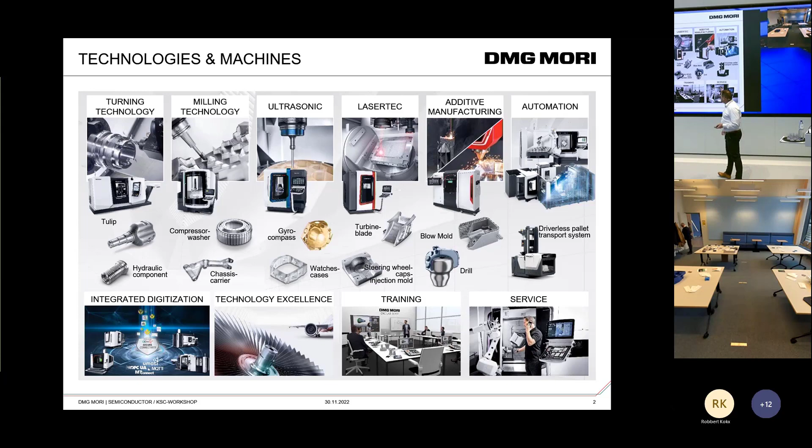Our topic is also automation. This is one of our topics meanwhile, same as digitization. Later we will talk about PMI, also from Mitutoyo, and of course digitization. We are very open and we are willing to go ahead with the new trends in future, also based on PMI models, where we see big benefit for all the later stages during the process. We have technology excellence centers for aerospace, die and mold, and we also will create the same one for semiconductor. We have training and service. We have a presence worldwide in 79 countries.

The green ones are the original DMG responsibility. The red ones are under the lead of Japan. We have 2 headquarters. One is in Tokyo, under the lead of the big boss, Dr. Mori. And we also have 1 headquarter in Germany, in Bielefeld, under responsibility of our chairman, Mr. Thönes. In total, we have roughly 12,000 employees, and we deliver roughly 12,000 machines per year. So 1 employee, 1 machine. Here at ASML it is maybe 1 machine, 100 employees or something like that. There is another relation, just to get a feeling.

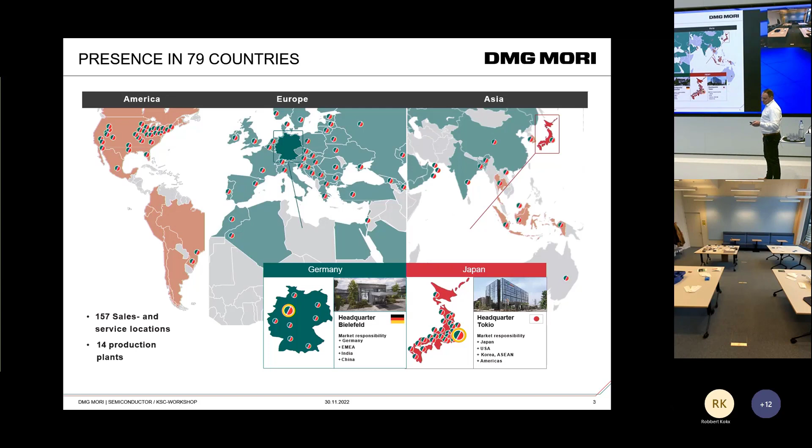We are also double stock listed. We have DMG MORI AG in Germany, and we have DMG MORI CO Ltd in Japan. We have in total 14 production plants. Here also you can see the original green ones from DMG, the red ones from Mori Seiki. We have the cooperation since 2009, so it's already 13 years old and is working really very well.

As I said, I'm from DMG MORI Pfronten. I can show you again, this is the factory in the south of Germany, number 2. This is the biggest factory under the lead of DMG. We had a technology day end of October. Mr. Granin was joining and also holding a keynote speech. And so, it's a good cooperation. And in our factory, we produce only 5-axis machines. You will see later in the video the meaning of a 5-axis machine.

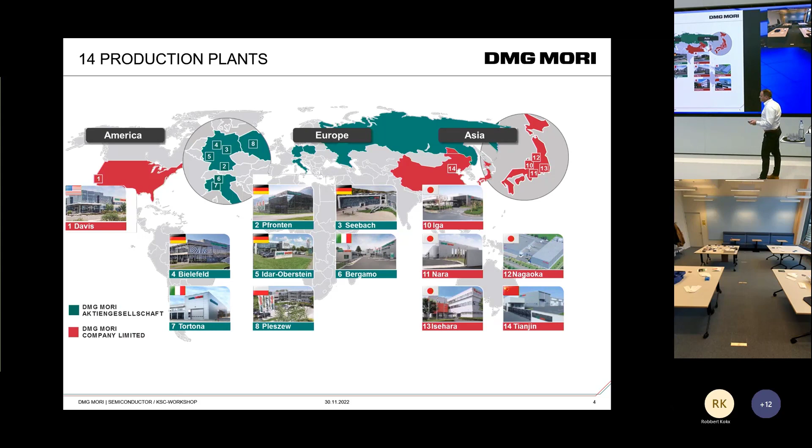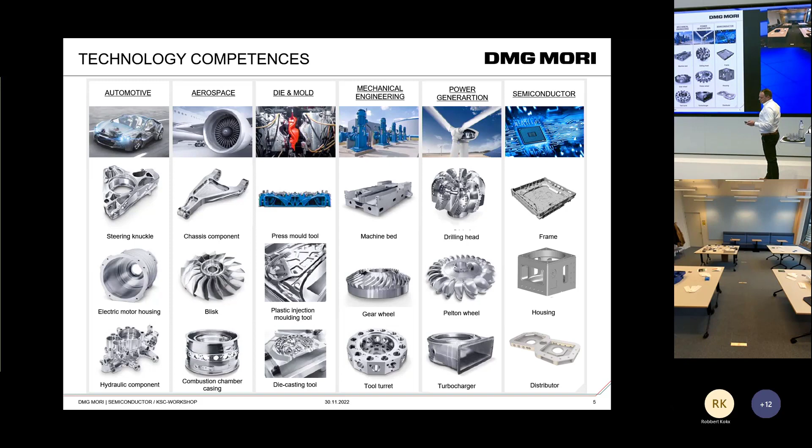Aerospace, we are very, very strong. We have here an excellence center. Excellence center means we get a drawing from the customer and then we check the complete process. The strategy, the programming, the tooling, the coolant, the software, the machine itself, of course. Mostly aerospace machines are equipped with a lot of special options because this is also high-class machining, especially the engine parts made from titanium or Inconel. We have die and mold. This is our origin. We have mechanical engineering. We have power generation. And we see also big potential in the business of semiconductor.

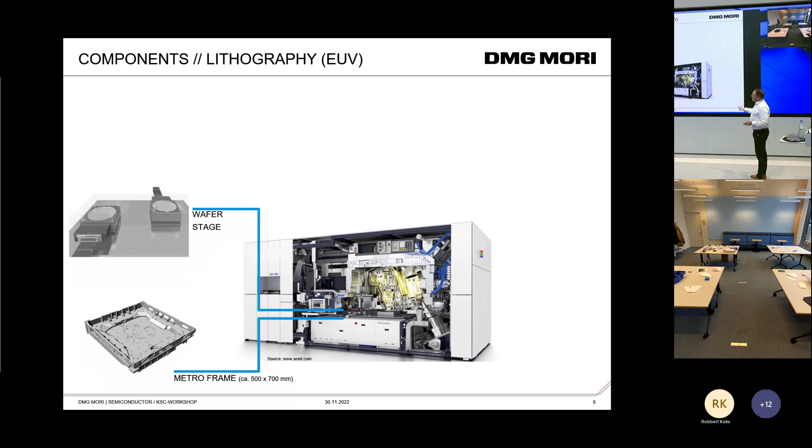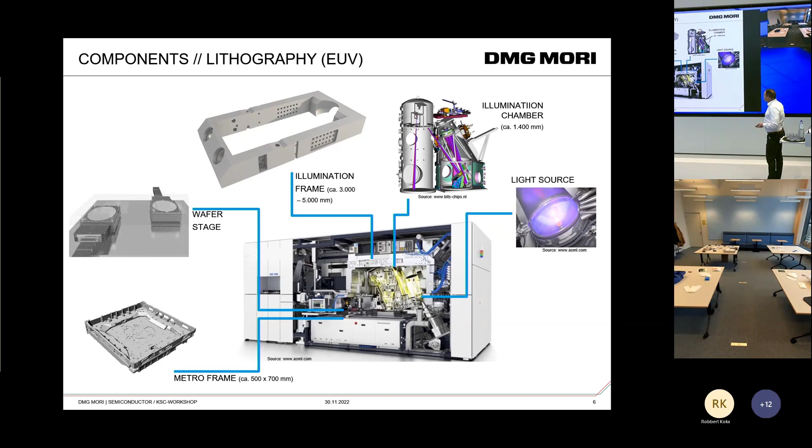Normally I explain the story from Adam and Eve about semiconductors, but I don't think I need to do that here today. I'll go into the EUV machine directly. I think you know the content well, and we see many interesting parts. We have the metro frame, titanium parts, the wafer stage, the illumination frame, which goes up to 5 meters in the next generation. We have the complete illumination chamber, the light source coming from Trumpf—also a very interesting customer for us—and we see the chucks. This is just a small selection of all the parts being produced.

But we from DMG MORI can offer the right machine for all these parts. We have the big portal machines up to 6 meters for the big frames. We have duoBLOCK machines for titanium frames—these are premium machines. We have monoblock machines for the smaller parts, and we have the ultrasonic technology for hard, brittle materials.

We can equip all machines with the mill turn function, meaning we can do milling and turning on one machine. This is very interesting for an optical housing like this. Here we can make 5-side machining of the complete outer shape, and we can do turning of the cylindrical center bore.

We also can equip our machines with micro precision to increase the accuracy of the machine to a very, very accurate level. Ultrasonic means the spindle is applied with a linear oscillation so you get a picking effect, and with this picking effect you can machine glass, ceramic, or Zerodur for all your mirror carriers or mirrors. The effect is the same as you know from your home drill—when you want to make a hole in concrete without the hammer effect, nothing happens, but then you switch on the hammer effect and it goes in very easily. This is the same effect here with ultrasonic.

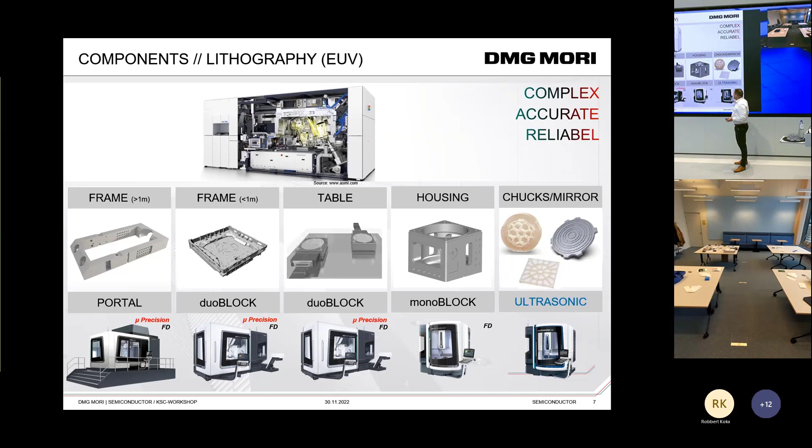This is our own company, and normally they use one of our machines as a basic machine, and they just enhance the spindle in regards to ultrasonic.

I'm here responsible for semiconductor for 3 years now, and I have a global view of the semiconductor industry. I know here in Holland, in Europe, and also in our company, many people think when you buy the machine from ASML, you can produce the complete chip. But this is only one part of the process—the lithography, the exposure of the chips. There's also the upstream process and the downstream process. For the upstream process, it's called deposition, where you add a new layer on the wafer. This is also very interesting for us, but here the music plays in the US or Southeast Asia.

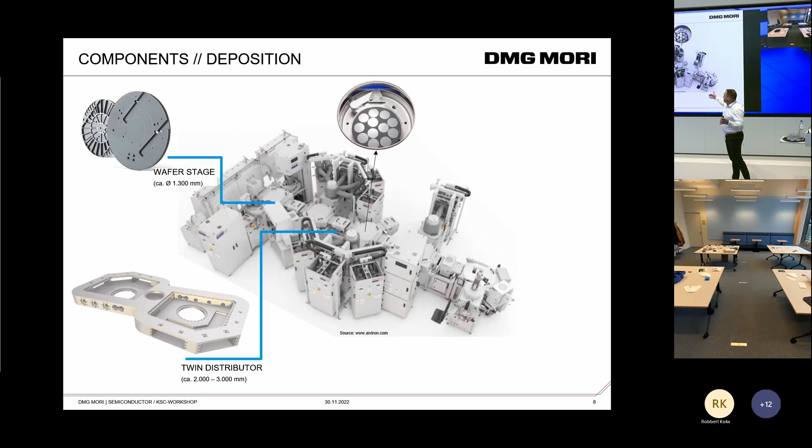Just to give you an overview of our machine capability—they also need very big frames machined out of one piece. They have wafer stages with a circular shape, perfect for our mill turn machines. They have graphite carriers; the wafer needs to be heated up to 1000 degrees Celsius, so you need graphite. This is also perfect for our machines because it happens by dry machining—there is no coolant used. Dry machining and chamber housings.

Over the last 3 years, we got so many requests about chamber housings. The distributor housing is the central part here. The wafers go in from the front side through the distributor housing, the wafer gets distributed to the chambers, and here happens the process—deposition, etching, cleaning, ionization. The principle is always the same, and the machines always look the same, though there are so many kinds of variants regarding chamber housings.

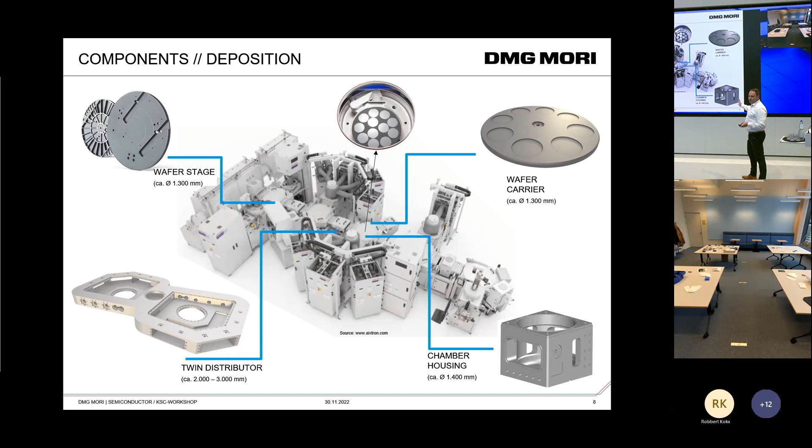We from DMG MORI like this part very much because it fits perfectly on our 5-axis mill turn machine. So here again, we have the big machines for the big parts. We have the chamber housings—this is a perfect part. We also have a video, but it's not prepared here for the presentation today. There you can see milling, turning, grinding. Maybe we can distribute a link for that. We have the stages and we have the carrier parts.

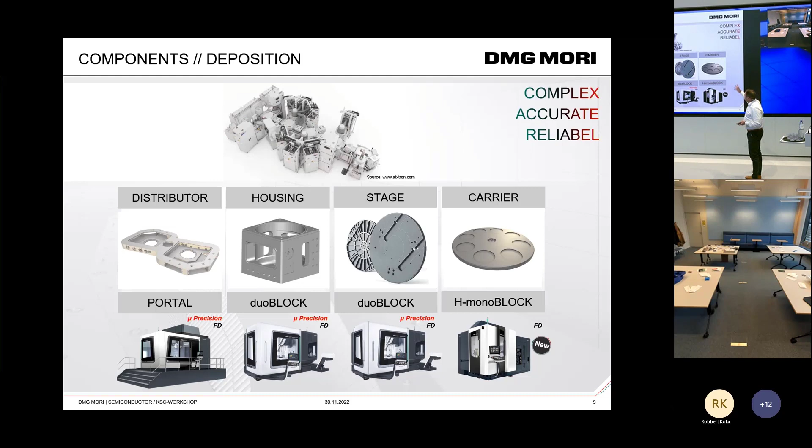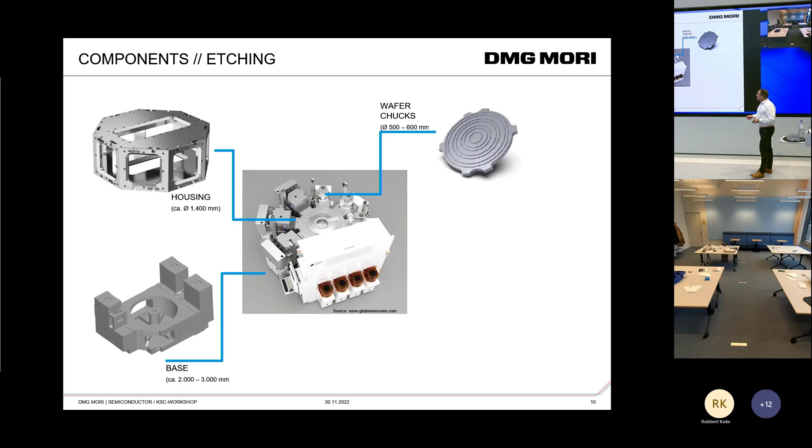Here is one machine for etching. Here we have the base part. We have the central housing for distributing the wafers to the chambers again. We have the chucks, which are always handling the wafers into the different housings. The chucks are mostly made from ceramic to be resistant against acid. And we also have the chamber housings.

So now I repeat myself. This is just a very quick view about the complete business and what we are covering. And we are very flexible.

We have universal machines. And if it is becoming more demanding regarding material, when we talk about titanium or stainless steel, or when we talk about high accurate parts, or multitasking, milling, turning, grinding, then we are the right choice.

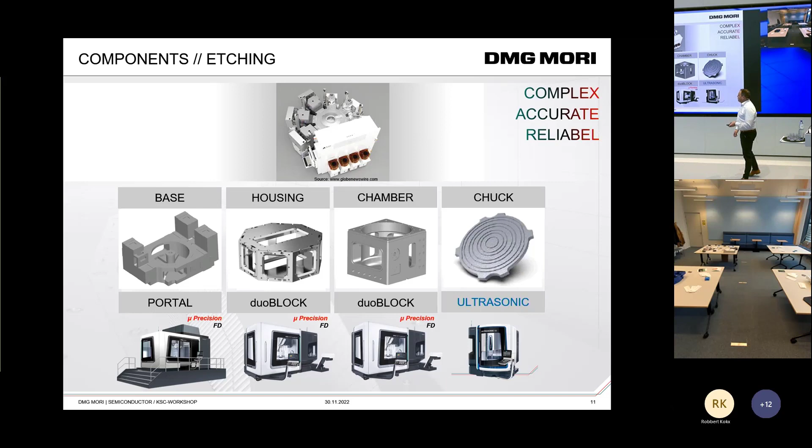One summary from my side, then I will hand over to Walter, and later I will explain the dummy part we have seen in the other room.

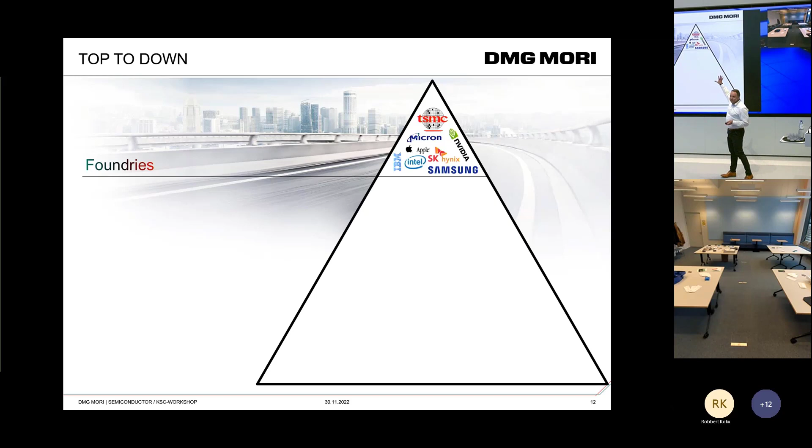I don't need to explain to you the foundries producing the chips itself. Here the wafer fabrication equipment is where you are. You see here some other names, and we of course try to touch or catch all these names. We also have good relations to Applied Materials.

The nice thing is you have no competition from the others. They are a completely different business, what they are doing. And we have the sub-supplier.

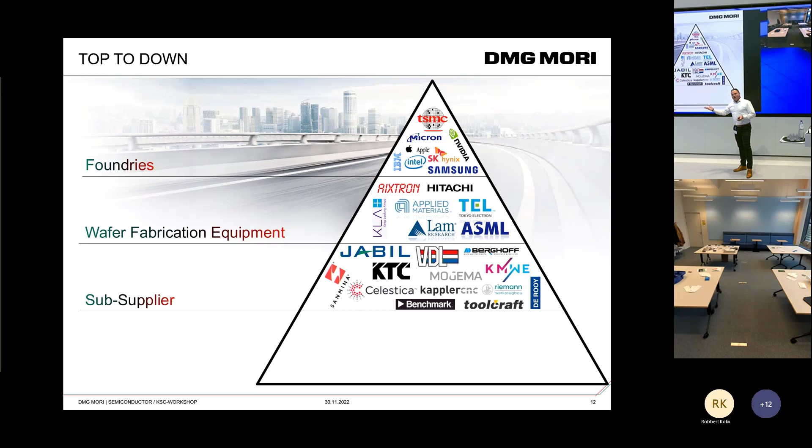Except for ASML Berlin, here are you our direct customer, but we supply our machine tools to the complete supplier network. And in this supplier network we find our customers for the classical machining - not hard brittle materials, but aluminum, steel, titanium, stainless steel. We find here the customers.

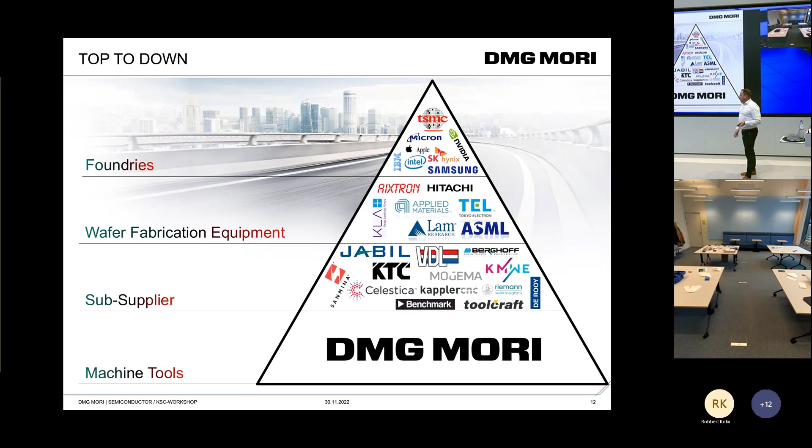And I know we already have a very good standing in this business. But it's a big honor for us that we have the contact directly to you and also to Mr. Sprengers, and that we could develop such a dummy part, as you will see later, together.

The beginning of the dummy part, Walter will explain, because he has the roots here in Netherlands, and he has the contacts, and here everything began.

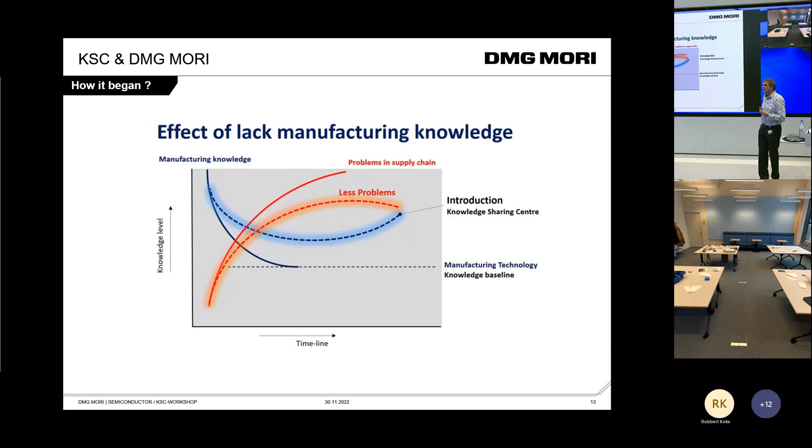And I think this is a very nice picture from KSC, where you see when a good collaboration is there, you will get a better knowledge from here, from the designers, but also from the suppliers for ASML or for other companies, so our customers.

The goal was to get more knowledge between the different parties. And you also see this nice picture on the website from KSC. And we're getting more and more part of it.

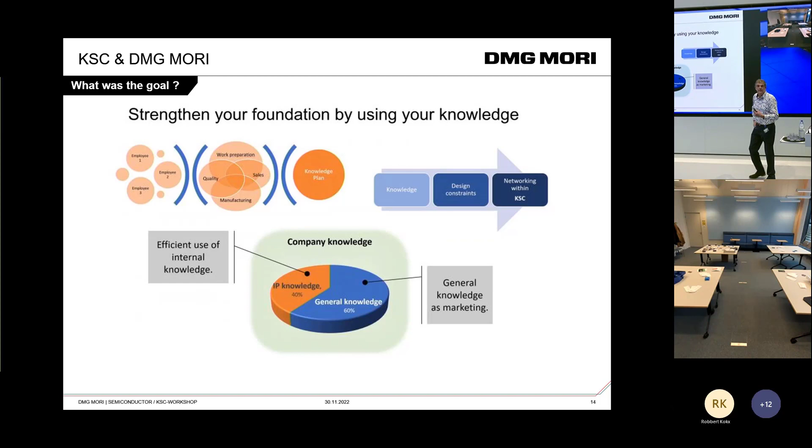But there was a challenge when we got in touch with each other, because we have the IP, intellectual property, from the parts, which are in different machines. And we have NDAs with our customers. We have an NDA with ASML. And our customers, so the suppliers, also have NDAs. So in that triangle, it's very hard to get all the information together.

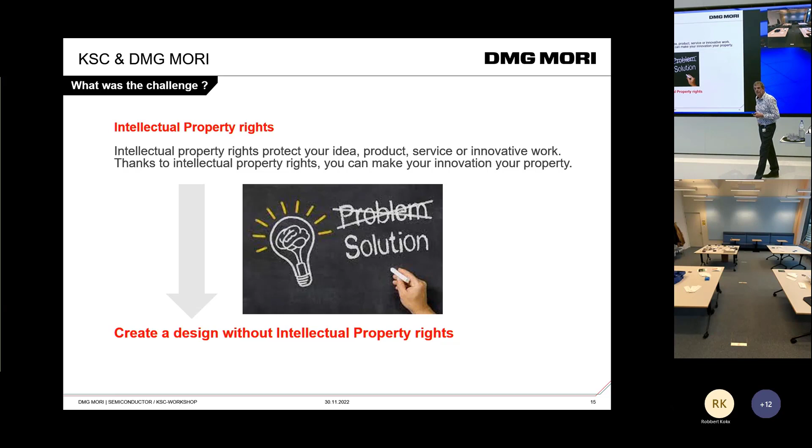So there was a problem, but for every problem there could be a solution. And after different discussions, we said okay, maybe it's possible to create a kind of dummy part. And in that dummy part, we can put in all the things which can be needed for the manufacturability of parts.

We have two bases, and one base, what we heard directly - let's say for us 2-3 years ago - is it must be based on a model-based definition. For most of you it's not a new thing. A few years ago it was completely new, but in the meantime it's getting more and more general. And that's the way of putting all the information from different parts in one system, like MBD, model-based definition.

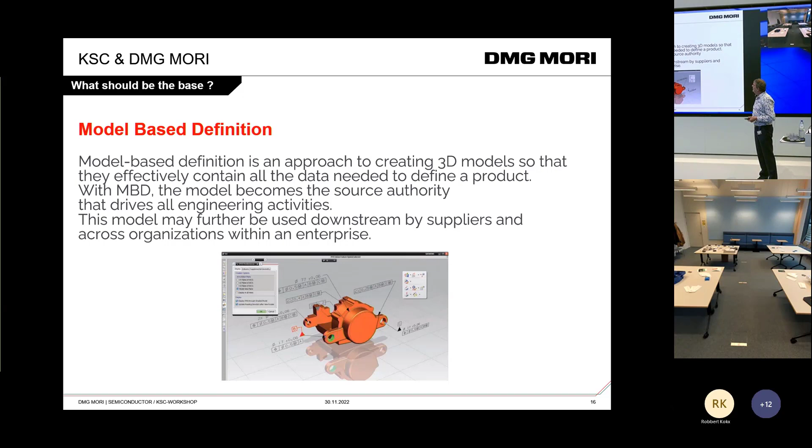And we had another base, that is the PMI, the product manufacturing information, which should be in the design of different parts. How can we use that PMI by programming the parts for our CNC machines, and how can we use the PMI for measuring it? Let's say the complete chain, starting from the design to the end of producing and measuring the parts itself.

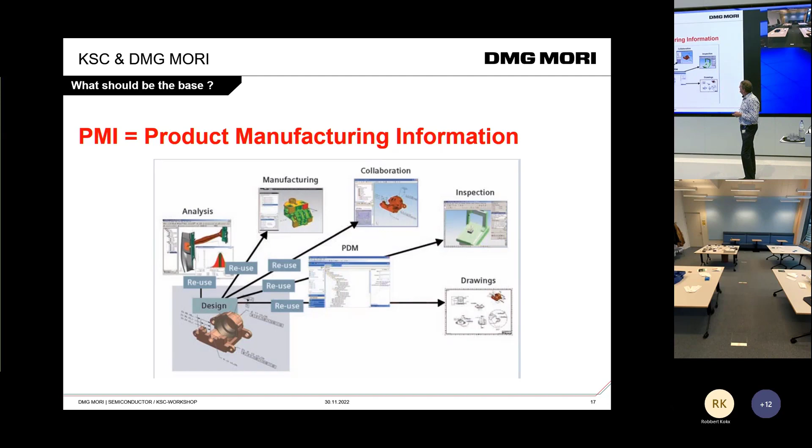What happens after some discussions, let's say December 2021, we get a first idea here from ASML, from the designer, what should be in a dummy frame. So a frame without any IP, with no NDA, and it should be free for everyone to use it. Yeah, that was the idea.

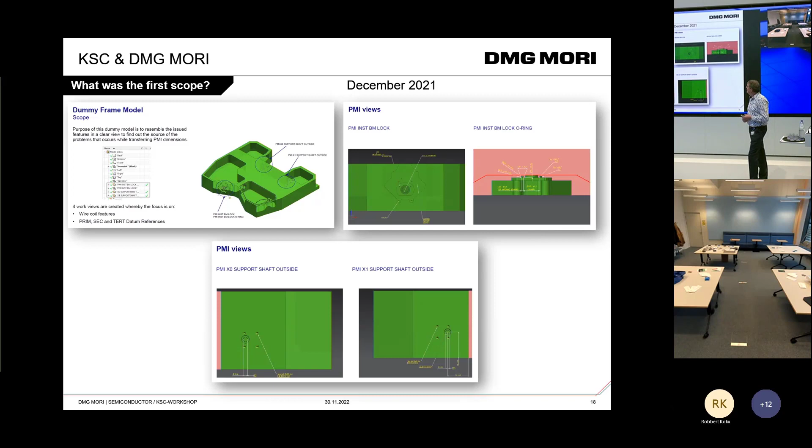Now after that, some discussions, we get the first idea from the model, and from the designers here, they said okay, we have to have some different things into that dummy file, into that first design. I will not go into detail, but here you'll see some screenshots from the first part what we received from our side.

Then there was the next step to go. Let's say they started in the beginning of this year, in January, with putting in different parts in the design, and in between we have for sure some meetings, and at the end, let's say at the beginning of September this year, we came together to a model where a lot of things are in which are needed for, in this case, the frame.

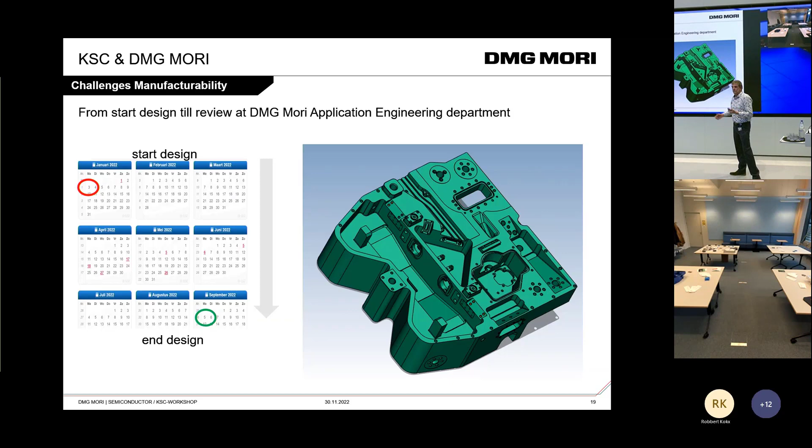Okay, when we have a model, then we get some challenges. What was the challenging? Manufacturability. We looked to the design and we said, okay, very nice model, but for some parts we need special tooling. And special tooling is, for example, angle heads.

You see later on in the video from Bernd how it works on the machine. But how do you come to an idea of designing such things into a dummy part, or in a general part?

But you have to know that an angle head is a special tool. Not every machine is able to use angle heads. Not every supplier is able to use angle heads in his existing machines. So you have to talk with your suppliers and with our customers. What do you need for these angle heads? Do you have a special machine? Do you buy different angle heads? How many operations do you have? In the first idea, we calculated maybe for one part, you need 20, 25 angle heads.

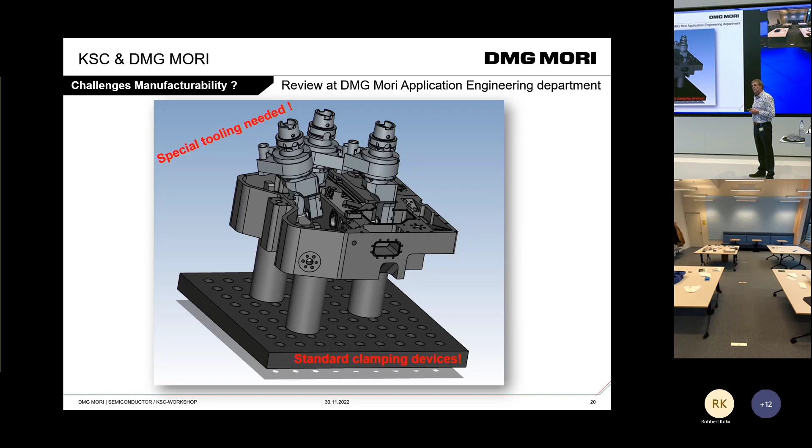What was the next challenge? Not really a challenge, but we have to create a tool selection guide. So we always looked at what kind of standard tooling we can buy or we can use from our department. You can buy a lot of tools in all different shapes and so on, but the goal is to use standard tooling which you already have or which is rather easy to buy in the market.

So here you see some examples from different operations in the part and the different tools we needed for that. And the goal was also to use the most latest inventions and developments in the tools. And of course, it has to be possible to produce it and to program it rather easy in standard CAD/CAM modules.

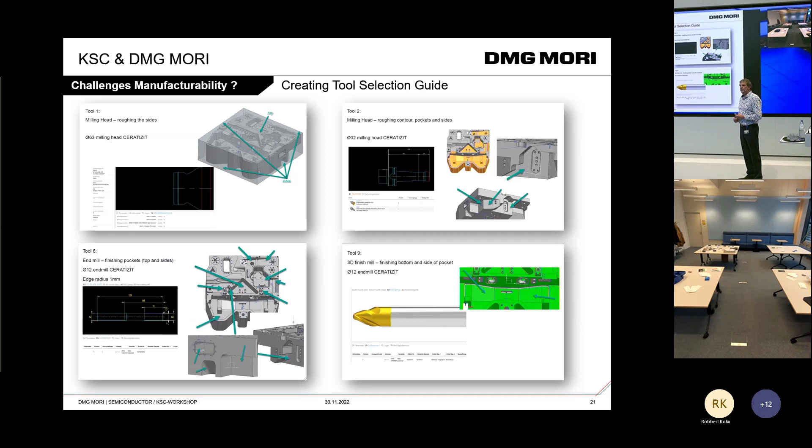Also, the review from our application engineering department had some remarks. So we reviewed it and gave feedback with remarks where you have to define, or what you have to think about as a designer, to combine some different operations, so that you can manage your complete process and your complete production by reducing your number of tools. So we gave feedback with this kind of screenshots and remarks on it.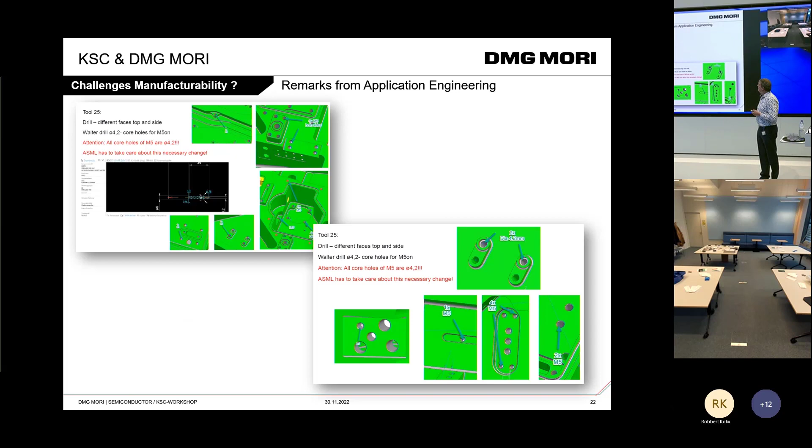Okay, after that process, we decided, okay, this will be the next complete dummy model. And okay, we decided also to produce it, to get something in our hand. And Bernd is telling something about that.

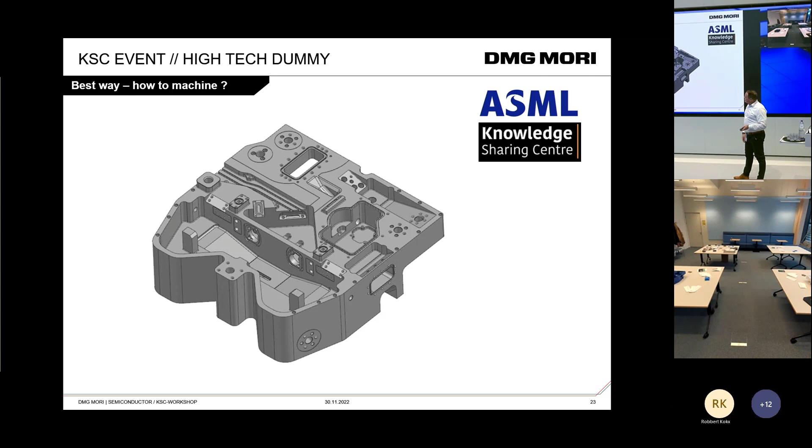Okay, thank you, Walter. Yeah, this was the bridge from the idea to the design, and then finally we had the revised 3D model. And today I have here more or less the pleasure to tell you something about the ABC of milling.

When you see such a part, every part has 6 sides. And you can machine one side where you clamp it later in advance. And then you have the chance that you can make all the 5 remaining sides on a 5-axis machine. 5-axis machine means that you can move 5 axes. In this case, we have a horizontal milling machine. We can move the tool forward, backward, up, down, right, left. And we can swivel the table, and we can rotate the table.

In this case, we can make minus 30 degrees of the swivel range of the table in both directions. That means we also can make negative angles from the bottom side. So here the idea is, when you think about design, you always need the bottom plane, and then this is the first part that needs to be machined. This can also be done on a simple machine, on a 3-axis machine, but you need this plane so that we can clamp it. And we clamp the part in the center on 3 pins.

This gives us the chance that we can reach the 6th side partly as well. And this is very important because we can finish now all the 5 sides in one step. That means you take out the risk by the operator, moving the part from machine to machine, new adjustment, new setup, new clamping. So this is always important to do it in 5 sides in one step.

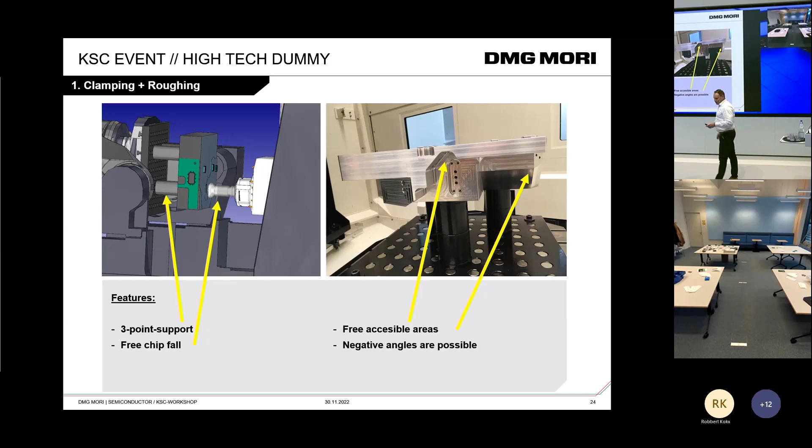And when we have a turning shape, which we don't have in this part, like the chamber housing, then we can do the turning also during the setup. And you have also no risk by the operator when they go from the milling machine to the turning machine. So here you see now a video how we start the machining. You can see the raw part clamped on 3 pins. Here we have the roughing tool.

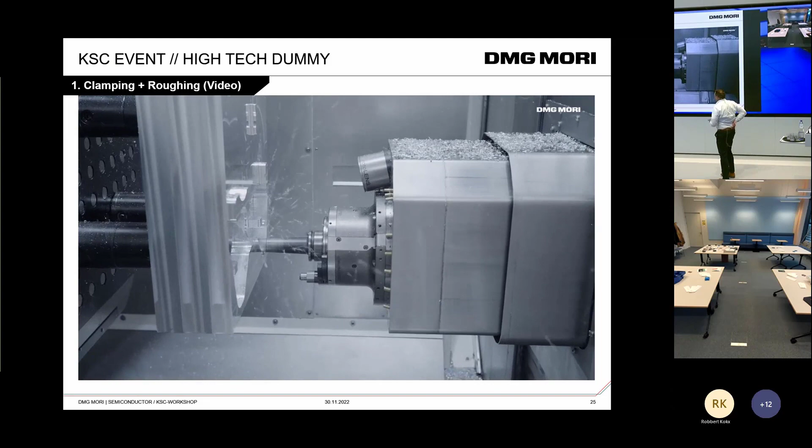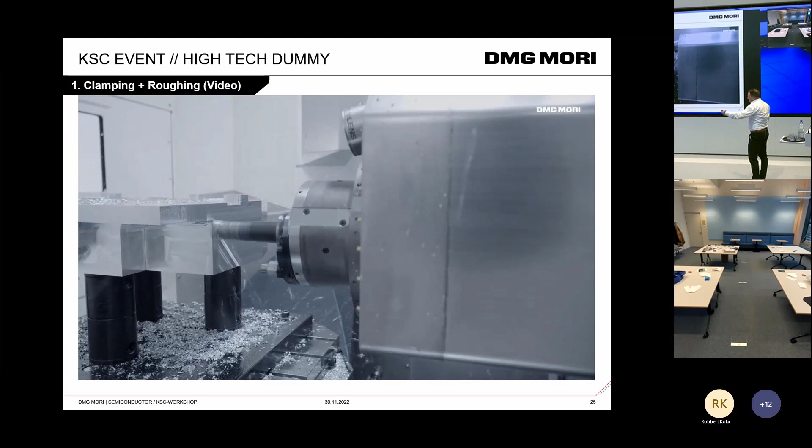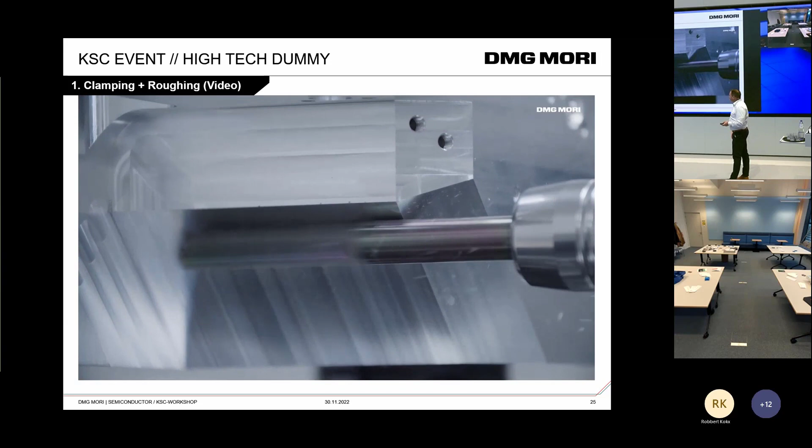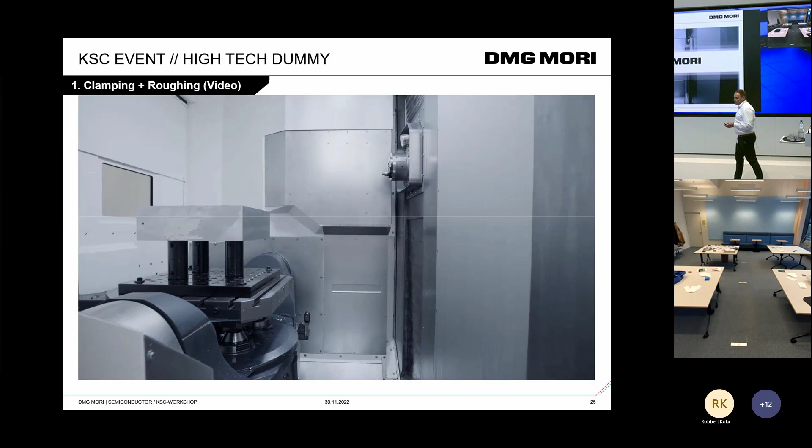You saw how the table swiveled and rotated into the working area, and then we make the contour of the complete part. Here you can see the 5 sides. You can make the undercut here. This of course depends how deep the undercut is, because I need to increase my tool length, but I get vibrations and I lose accuracy. This is always important to think about how deep my pockets are.

Normally with a 5-axis machine, and when we talk about materials like stainless steel or titanium, we prefer always the solution with short tools. On a 5-axis machine, when we do a pocket, then we can swivel the head and we can go into the pocket with a short tool. Sometimes it is necessary to make it from the top side like a 3-axis machine, and you can see, maybe when you see the part later again, there are some pockets in.

Here the pockets are 90 degrees. That means we cannot make this in this way. We need to make it from the top. And the pocket is roughly 100 mm deep. And when we received the 3D model the first time, the radius here in the corner was 2 mm. So you can imagine a 2 mm milling tool with a length of 100 mm.

This is the same example as when you want to drill with your drill at home in wood, a 2 mm drill 100 mm deep. Maybe 5 mm and then bing, the tool is broken. So therefore, it's always important to think about in such corners, is 2 mm necessary? Because it's almost impossible to machine afterwards.

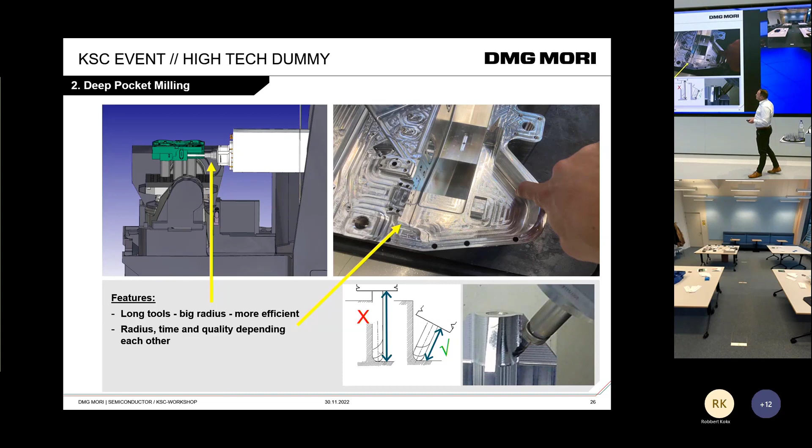Now we made a 10 mm radius, and we machined the part completely in roughly 2 to 3 hours. When you have here a 2 mm radius, then we need to make it very slowly and very filigree, and we need 50 hours. That's a big difference. This is always where you need to think, do I need a 2 mm radius in such a pocket? Here you will see that.

This is now a strong tool. This is exactly 100 mm, what we need. You see we are very close with the tool holder, maybe 5 mm space to the workpiece, so that we absolutely do not lose stability in the tool. At the end, we will find... normally, with a 2 mm radius, this is not possible. You need to make it very, very slowly and line by line in hope the tool is not broken.

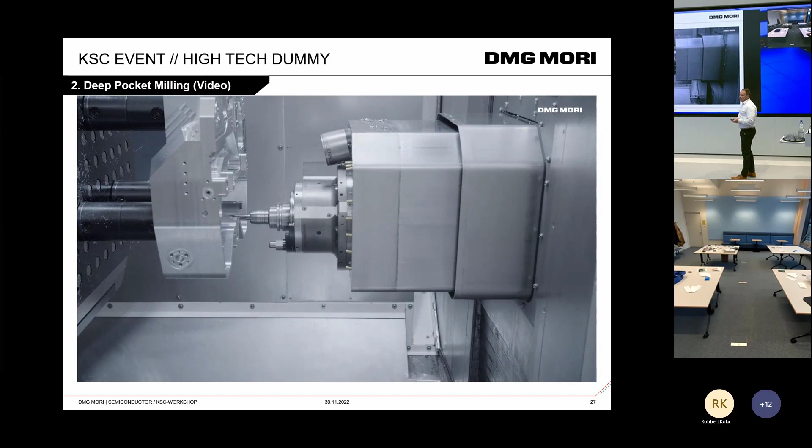This is absolutely process safe in this case. Then it's always very difficult to make inclined surfaces. Of course, we have a lot of inclined surfaces in this part, but this is a little bit difficult. We have a 5-axis machine, we can do it line by line. But when you do not have one, then you always need a special fixture. This is like here: when you cannot tilt the table or the head, then you need to tilt the workpiece and bring it in position, and then you can make an inclined surface.

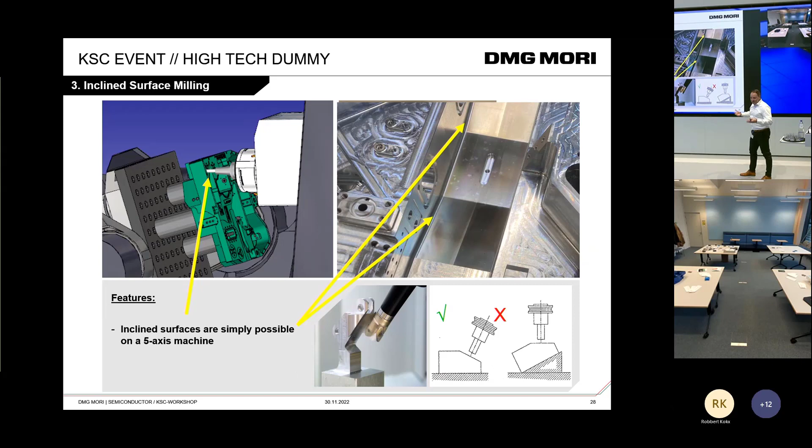And for such an inclined surface, here we also need two tools. We need a ball end cutter, and we can only make it line by line. We cannot take a big chip. We need to make it slowly in a very filigree way. But it costs time. Here you can see this is a ball end cutter, and we only take a small chip. And here now we go line by line, we take out.

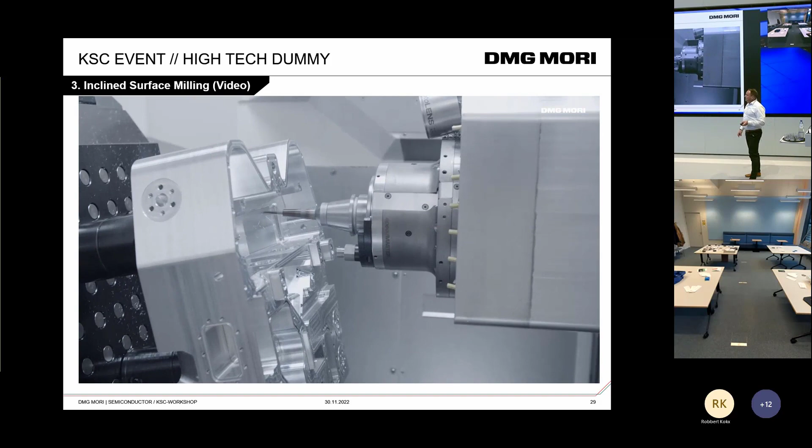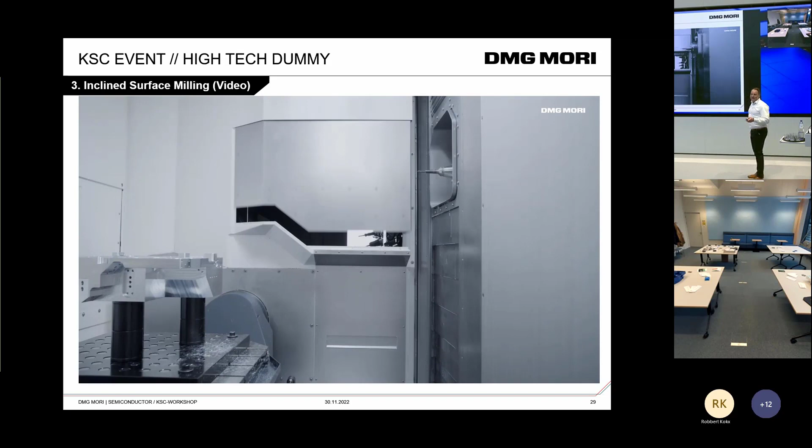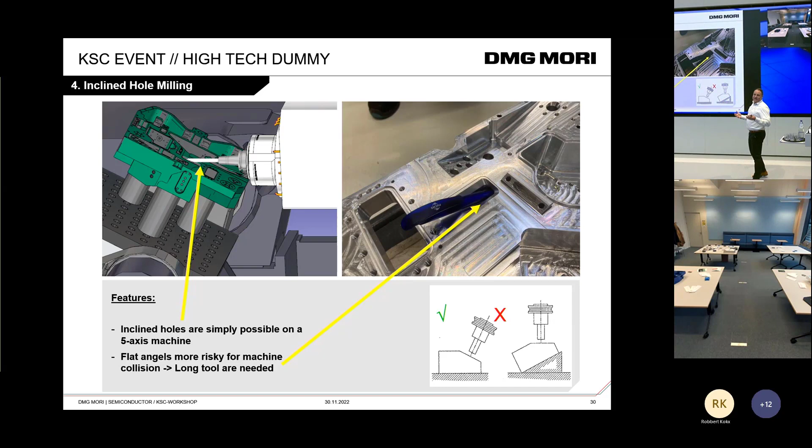I was too fast, the same is for inclined holes. When you look at the part, there is one hole with a very flat angle, in principle through the center of the part. And here in the picture you can already see we need a very long tool so that we reach it and can go in. And a long tool always means the tool starts hanging, the tool gets vibration, and at the end it needs more time, and the risk is higher for an inaccurate result.

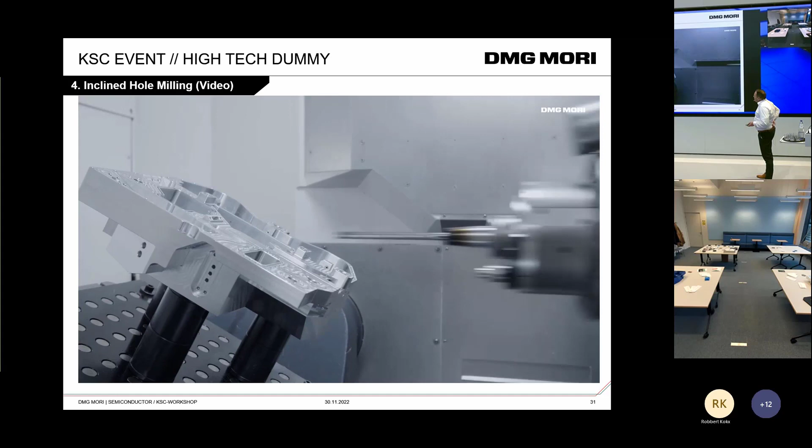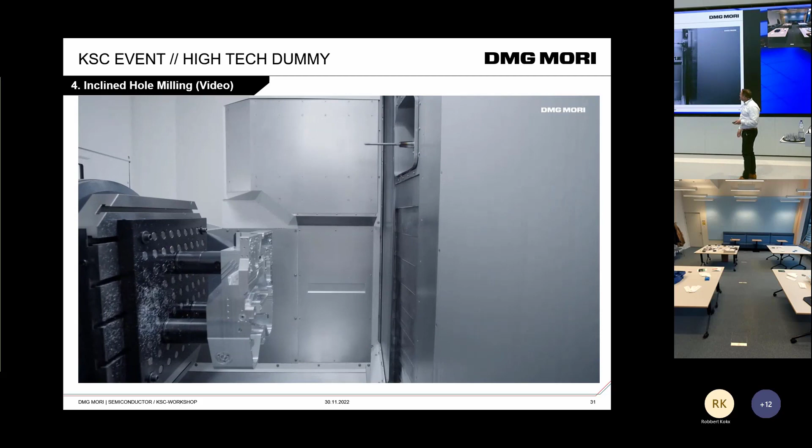Yeah, this you can also only do with a 5-axis machine. Also, some 5-axis machines cannot. When I said the block, this is another kinematic. There we also have some differences, because there the head is stronger. But always keep this in mind, maybe the next time when you design a machine.

So, as already mentioned by Walter, when we received the part the first time, you can see there are two pillars. And when there is a pillar, then it takes the space for going in with an angular head. And we did it with angular heads, which are really at the limit of how small you can make it. So that means every hole and pocket and every shape on a 90-degree vertical wall we need to reach anyhow. And in this case, we can do it only with the angular head. That means we need to bring the tool into a 90-degree position so that we can reach it. We cannot reach the holes with our basic machine. This is not possible.

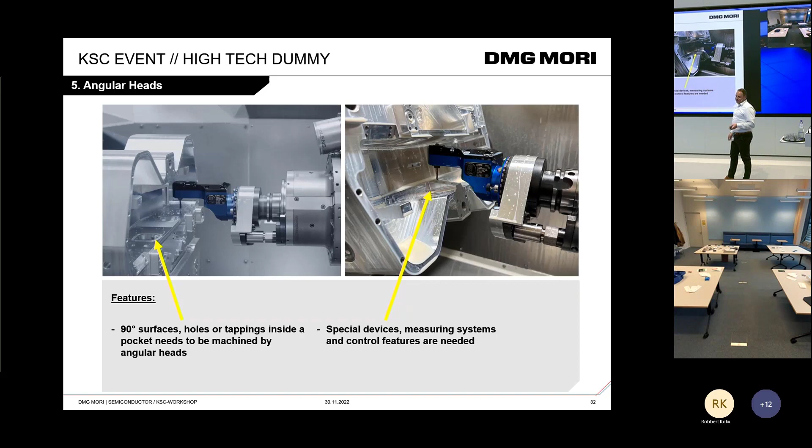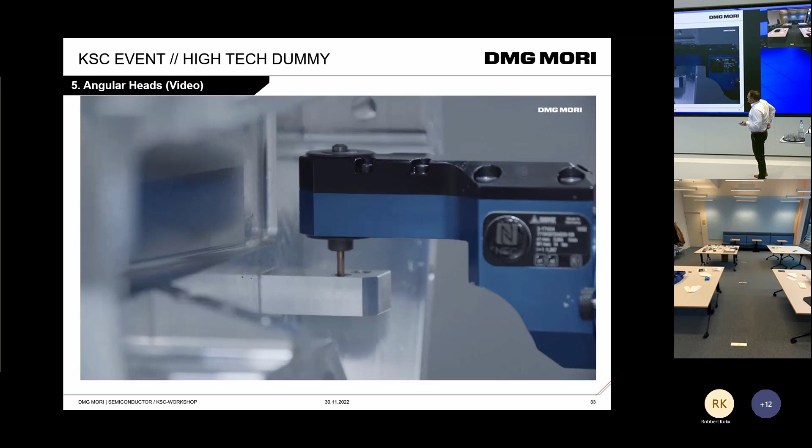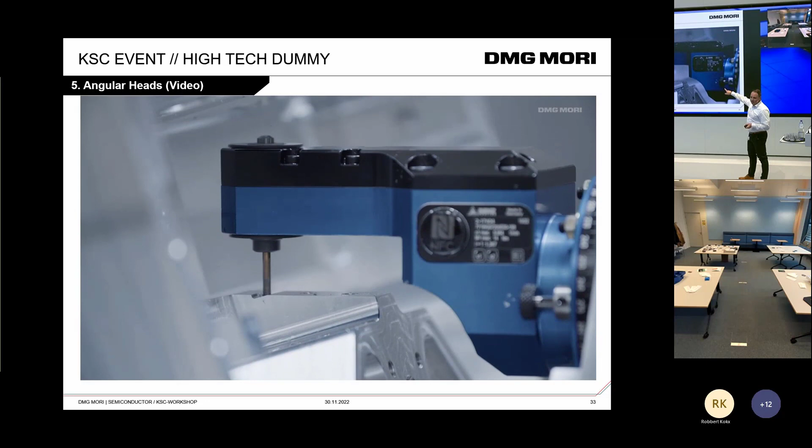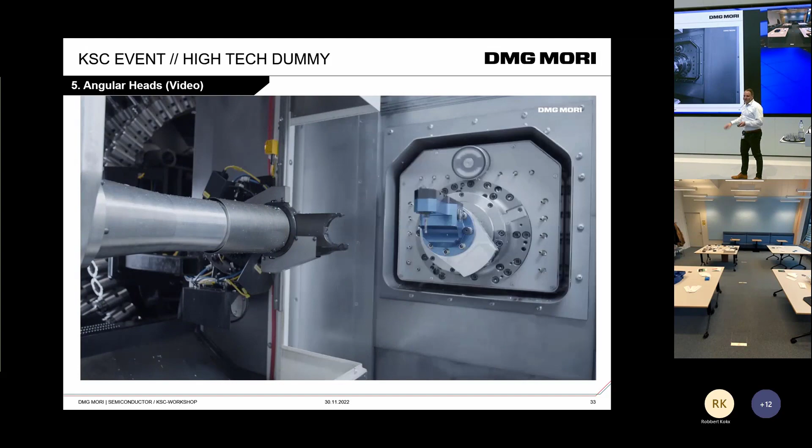This is not so special. In aerospace and all other cases, we use such heads everywhere. We also have an angular head in aerospace where you can make an automatic tool change and everything. Here we change it. When the hole is 100 deep, then it's not possible. We have no space. So for this case, to take care of the costs, we really want to... As already mentioned by Walter, there are many different tools that we have.

This is a nice feature. I also want to let you know, this is more or less related to the machine tool side and to the supplier branch where we make the promotion. When you make sealing grooves, here with a shape that looks like a cathedral, or here a typical rectangular shape, this we can produce very nicely by shaping.

Because normally, many customers are doing that, and I know there are a lot of quality issues when they make it by milling. When you make the grooves by milling from the top side, then the walls will get the same direction of the tool as the tool is standing. That means the air or the gas can go out. And when you make it by shaping, Schaben, as we say in Germany, then you have the lines of the tool in the same direction as the rubber later. And then it's better sealed.

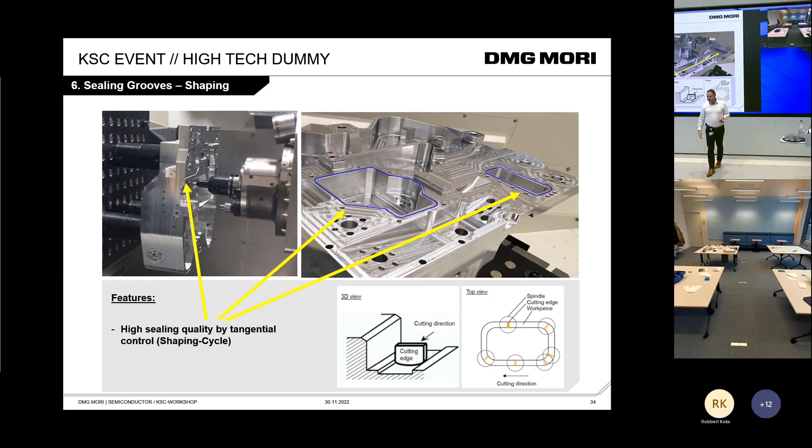Here you see the outside was done by shaping. So this is one thing you don't need to be afraid of. I'm not sure, is there any remark possible? Like that.

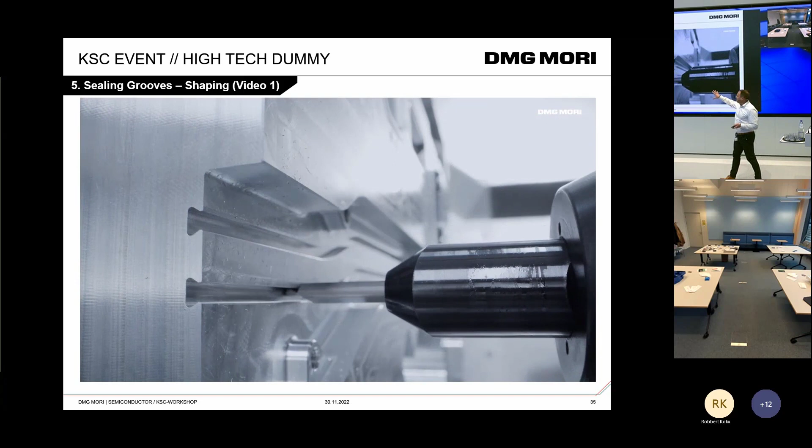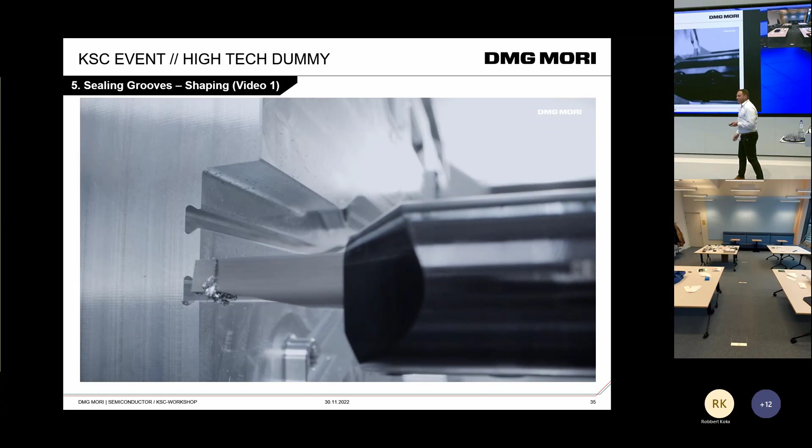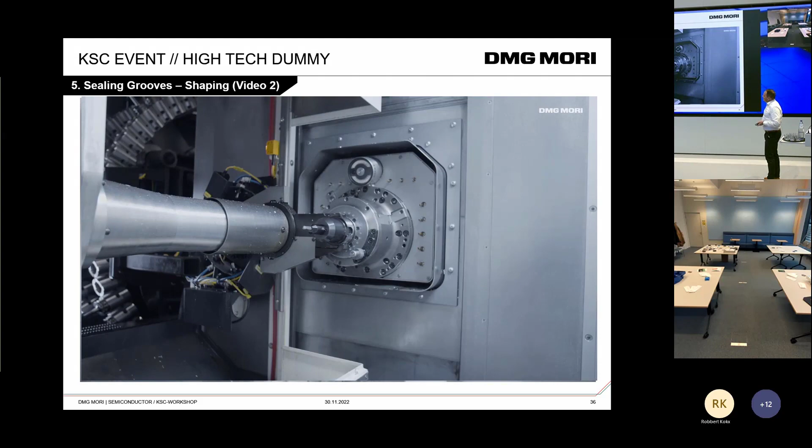There is a... here you can see how big. This is here the shape. Of course, we also can make...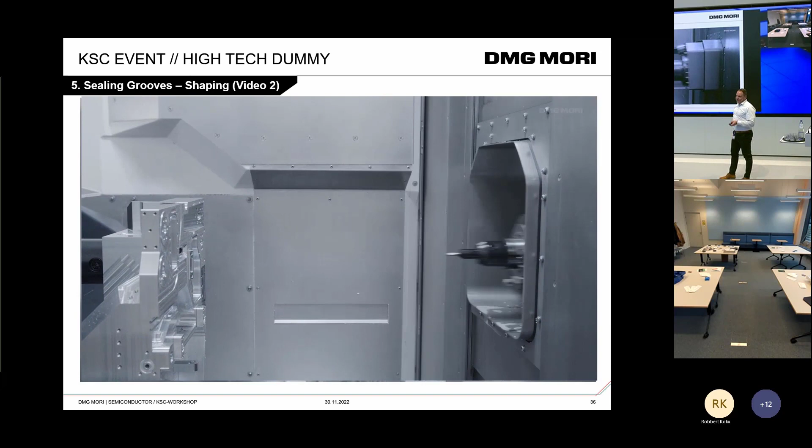Yeah, that's it from my side in principle. That's the summary. This is what we are taking care of. I mentioned we have the big machines for the big parts. We have ultrasonic for ceramic parts. We can machine titanium, stainless steel. We can do graphite machining. My colleague, Mr. Benedict Brox, he's responsible for the ultrasonic applications.

Here we have the chamber housing. There we also have a very nice video on YouTube. There you can see milling, turning, grinding on one machine. Also the usage of some technology cycles, like a touch probe, so that you can measure grooves while machining, interpolation, turning in a circular way. And yeah, this is also one thing when we talk about technology.

And when we get a part and we talk about tolerances around 5 microns, 5 microns on a part with 400 mm like this, then it's normally not possible that you can machine it completely from the beginning up to the end with a constant program. That means we make the roughing, we make the pre-finish, the semi-finish, and before we go into the last cut, we use the touch probe and we measure the complete part, and then we adjust automatically the finish cut. And then we finish it.

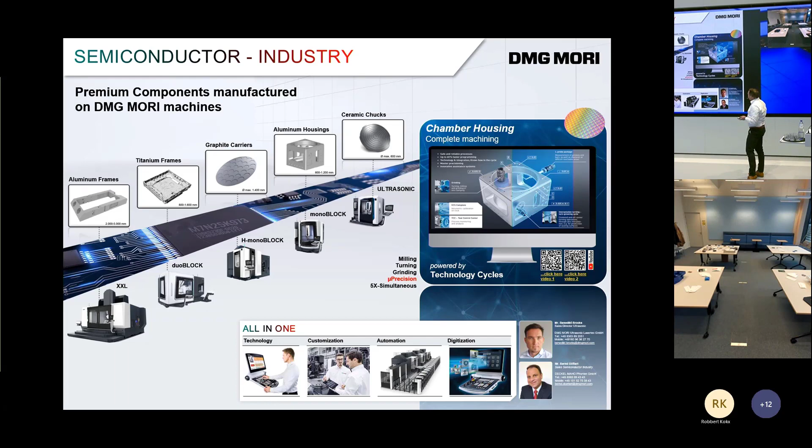In-process measuring is here in principle the magic. And therefore you sometimes need such an L-touch probe so that you can go inside of such grooves as shown here. We also have additive manufacturing. It's called SLM, selective laser melting. This machine, of course, we have in our program. But this is really very, very interesting.

My colleague who is responsible for additive manufacturing asked me if I can show here one or two slides, because I know that with the EUV machine your biggest enemy is heat, and the machine creates a lot of heat, and you need to cool down everything. And heat is also the enemy of accuracy at the end. And with the SLM technology, during the 3D printing of the part, you can incorporate cooling channels. Normally, such a part is not possible to manufacture in the classical way, by milling, turning, drilling.

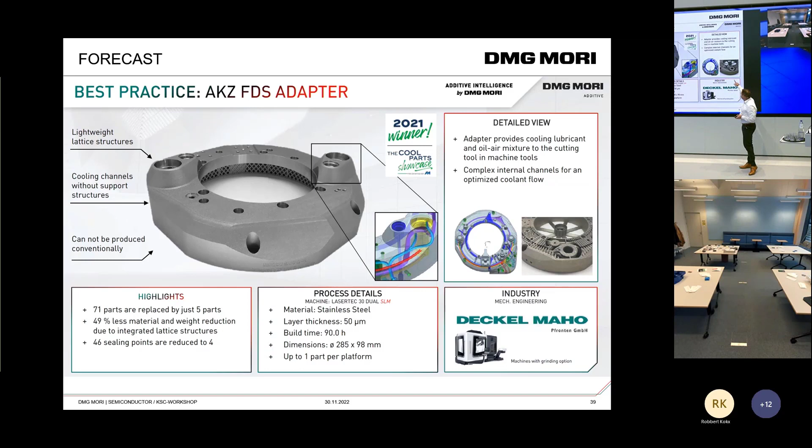Normally, when we do it in a classical way and we need some cooling channels, then we need to drill it, and afterwards we need to close it by welding or something like that, and maybe we need to mill it again. But here with additive manufacturing, you can build up the part completely, including all the cooling channels, as you can see here. This is a big, big advantage. Also, you can make parts like that which are 100% customized to all the fittings you need on your machine or your device.

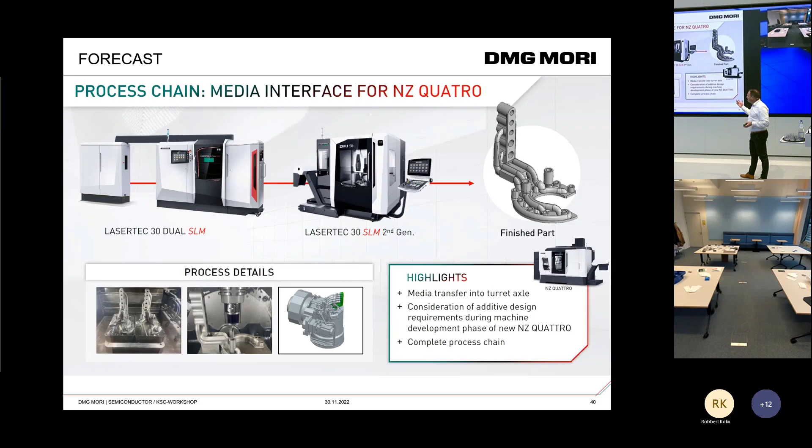So, Mr. Sprengers, maybe this is our, let's say, wish, to make one more workshop only for additive manufacturing, because this is really the future. And here you can think in really very crazy dimensions, and it's possible. And we have major solutions, and it is already used for the aerospace business, and many other customers are also making use of additive manufacturing. Just a small forecast; if you have any idea, you can ask me. I think they will distribute our contact, and just to give you a mind opener.

Yeah, we don't need to talk about the machine. So yeah, we are at the end of the presentation. Sorry, we are a little bit too long, but we started earlier because the previous sessions did not take so long. So any questions from you, for me? Any questions can also be afterwards in the Q&A or even... Okay, absolutely. Yeah. Great. Nothing at the moment.